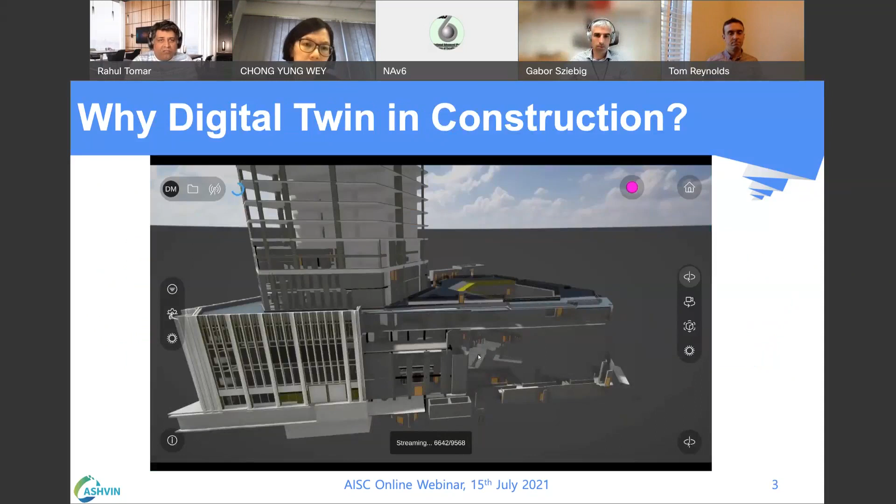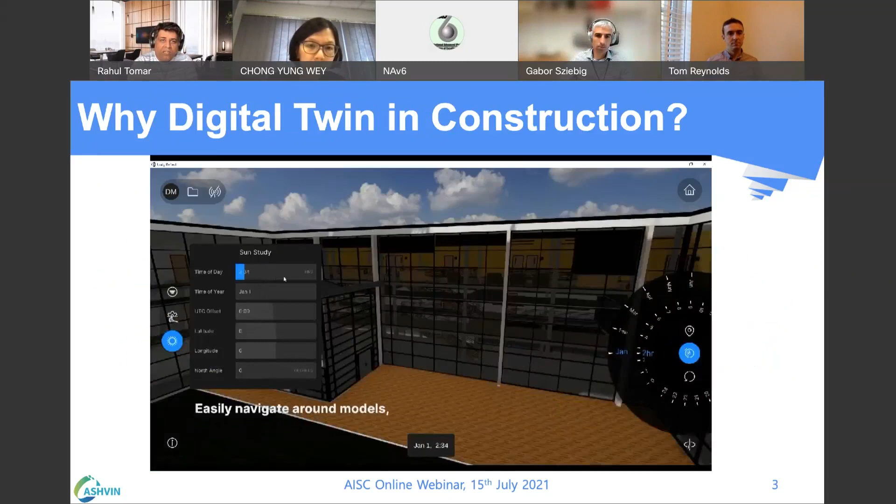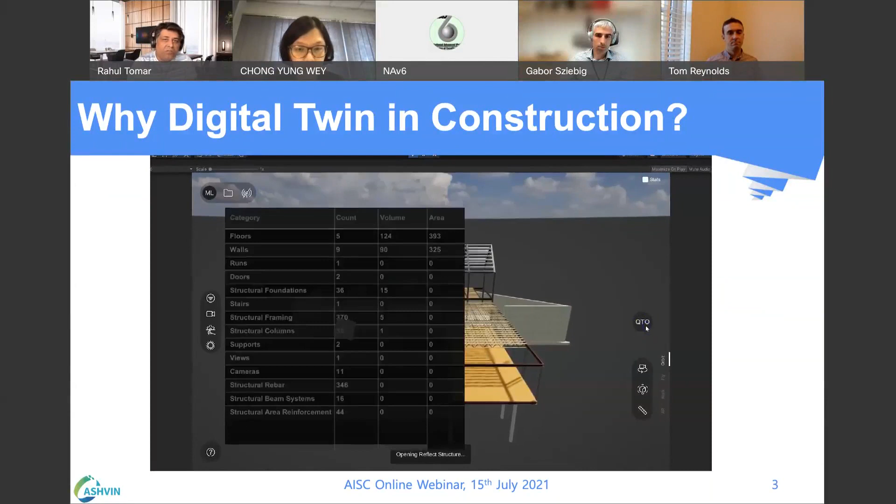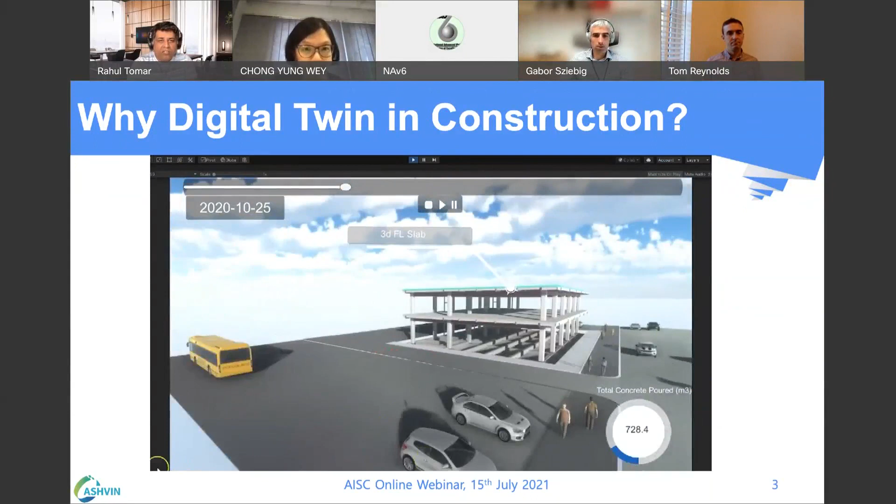But why do we need a digital twin in the construction industry? This video explains it simply: in order to monitor the real construction site in real time with what is happening, and then be able to compare it with the concept of as-built versus as-designed. When this is possible in real time, which is what we are right now working on in our project, Ashvin, it makes life really easier, because currently the data comes from the construction site, then you have to update the BIM model, and only after that can you see what is happening.

How this is going to be possible is to connect every data source from every part of the construction site, and first send it to the central database. This is done using the concept of an IoT platform, which we are building within the Ashvin project. Ashvin is one of our European Commission funded projects under the flag of Horizon 2020, which started last year, and we have approximately 12 partners from different areas.

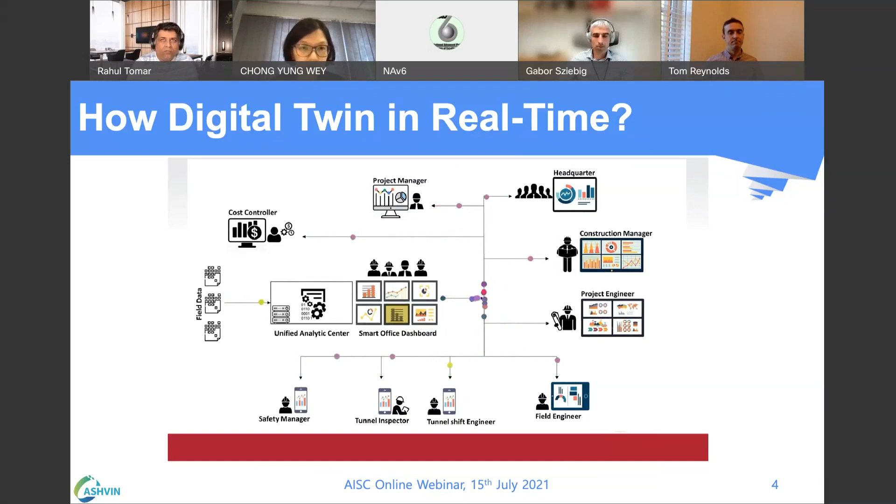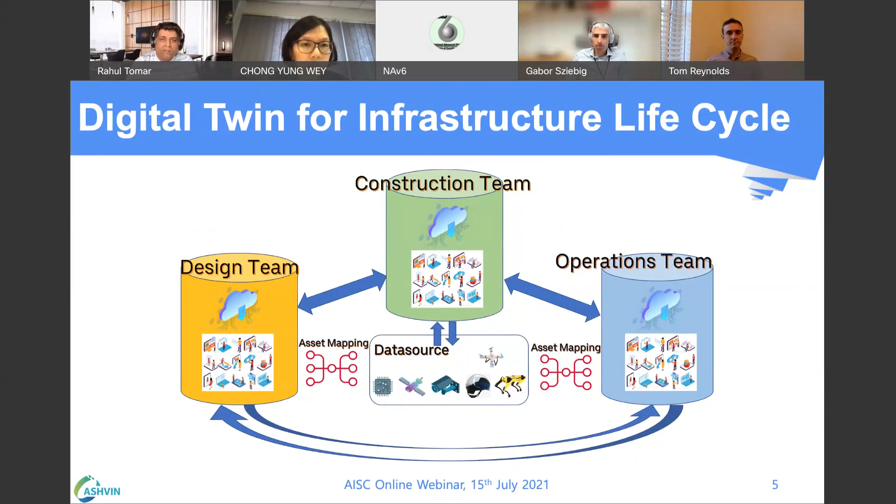What is a digital twin for the infrastructure life cycle? In this project we are not talking only about a digital twin from the construction phase, but also from the design and operation phase. Because unless we combine the full life cycle of infrastructure, there is no point. There are different software available for different phases, and nothing is connected, so everyone is in their own world. Within this project, we want to connect all three phases of the infrastructure so that it can be monitored, constructed in the future, and designed in a better way.

But with the real-time digital twin, we have a challenge. The first challenge is capturing construction progress. We can capture it via 360-degree cameras or LiDAR cameras, but to capture and then analyze this 3D captured video, images, and point cloud is the biggest challenge.

Not offline, but in real time. In real time comes a big challenge: how to capture it, analyze it, then disseminate it into four dimensions, and render this graphics onto the platform, for which we are currently using a game engine, because we realized the video game engine is much easier to render graphics in real time. Still, not with such a big point cloud, but with small point clouds, it's possible to render in real time.

Within the Ashvin project, as I mentioned, we have 12 partners. Technical University Berlin is leading as coordinator, and we have industry partners, research partners, and also Austrian Standards looking into standards for the digital twin, because right now in the construction industry all the standards are basically based on BIM, not the digital twin. So there is a difference. This is what we are also trying to understand, how to create or make new standards possibly within the digital twin format.

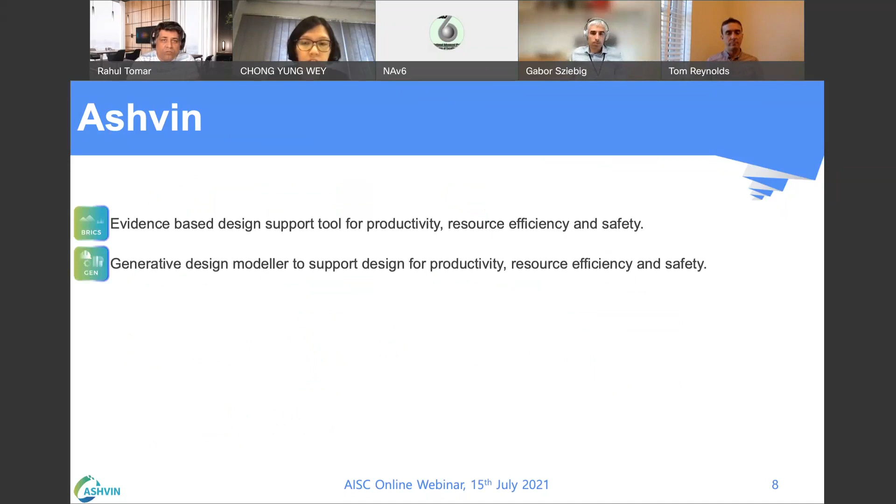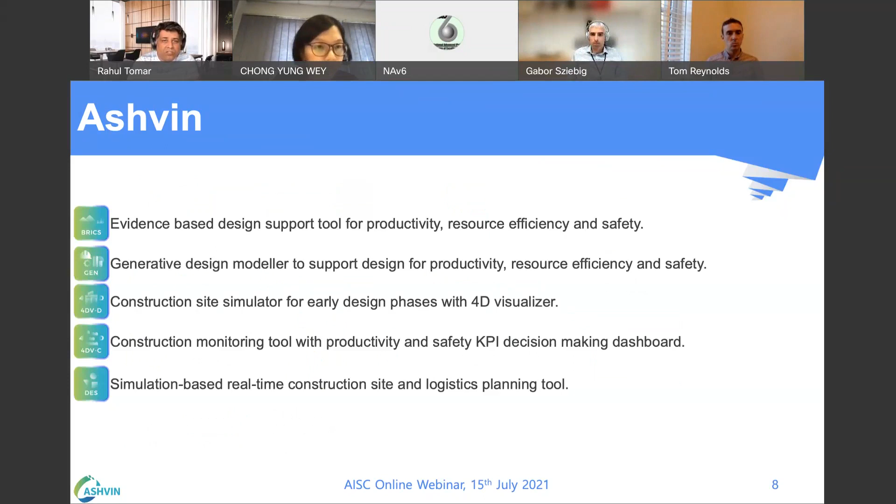In Ashvin project, what we are doing is creating some tools: an evidence-based design support tool, a generative design modeler to support design for productivity, a construction site simulator for early design phases, and a construction monitoring tool with productivity and safety, simulation-based real-time construction site and logistic planning.

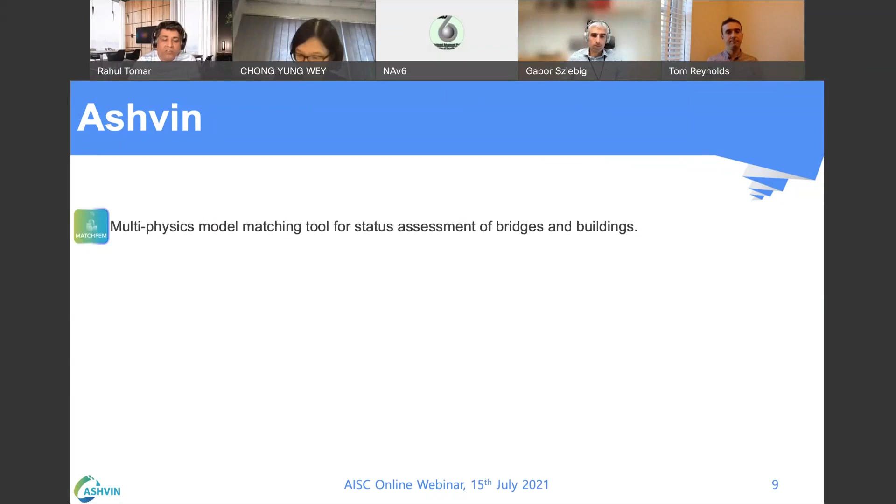The multiphysics model matching tool is very interesting - it's used for status assessment of bridges and buildings, making it possible to use tools like Grasshopper and connect it with the digital twin in real time. There's also a risk-based status assessment tool, GIS integrator for digital twin based asset management, a safety management simulation and training tool, and a configuration management tool to track as-designed and as-built, allowing seamless commissioning.

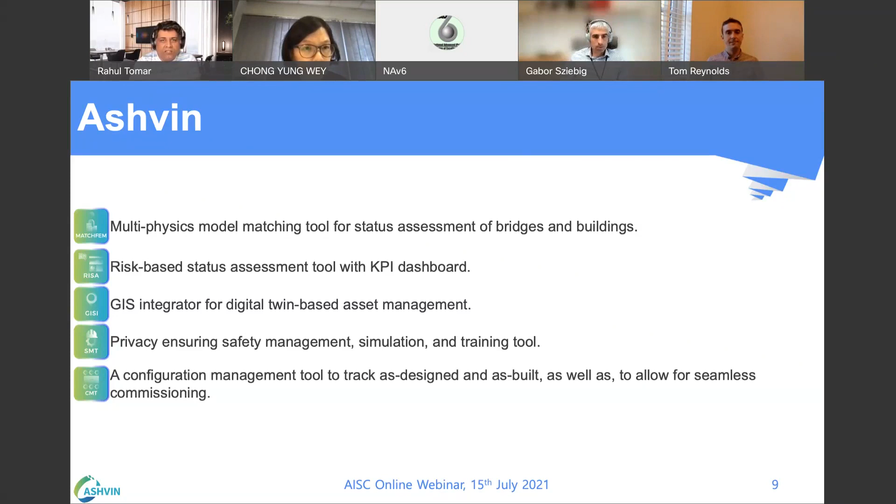So this is about the digital twin, what we are doing. Now the point comes to AI in the construction industry. Digital twin will not work very well unless we utilize artificial intelligence technology also. This is the concept for what we are doing within the digital twin technology.

This will come after our Ashvin project - better AI for better design of buildings through generative design. We are also working on an artificial neural network to predict cost overruns based on factors such as project size, contract type, and competence level of project managers. Right now we are doing this only in tunnel construction, not in building construction per se.

We're developing AI and machine learning solutions to monitor and prioritize risk on the job site, so the project team can focus their limited time and resources on the biggest risk factors. Then there's AI for construction safety, using image processing to understand if everyone is wearing the right gadgets on site, and if any object or person is in between the movement of equipment.

And AI for post construction - when we have to monitor the infrastructure, we use artificial intelligence to understand what is happening and if any predictive maintenance is required.

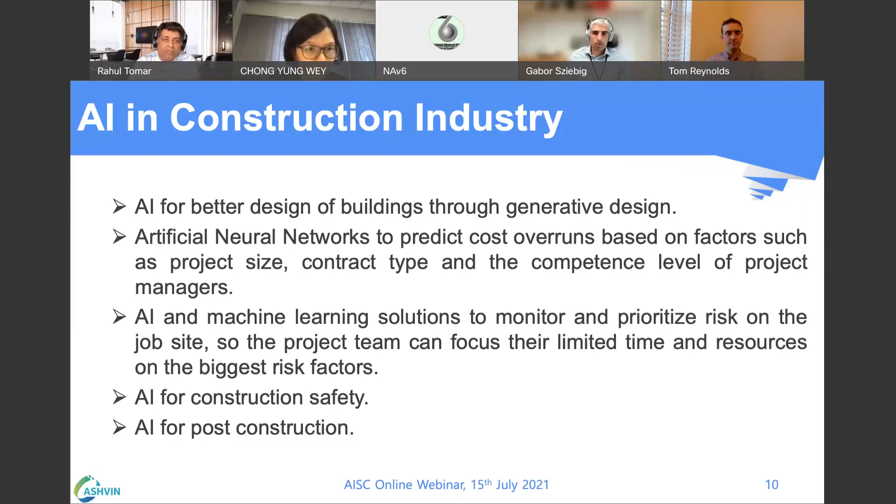For this, within the digital twin technology, we developed a virtual meeting room like what we are doing in this WebEx, but using a VR headset very specifically to collaborate geographically or in real time into the construction site using the BIM model.

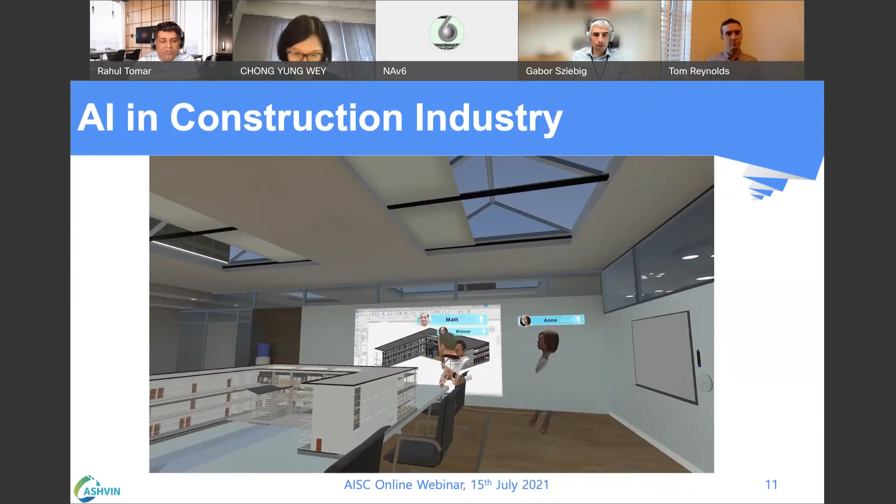So what comes in the future after using artificial intelligence for building monitoring and everything - we are also working on, which is in our pipeline, how we are going to use the complete construction site in an automated way.

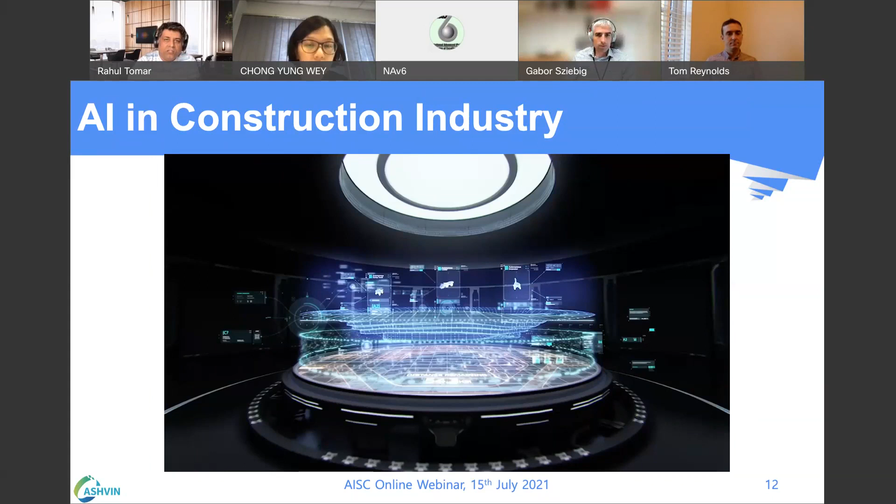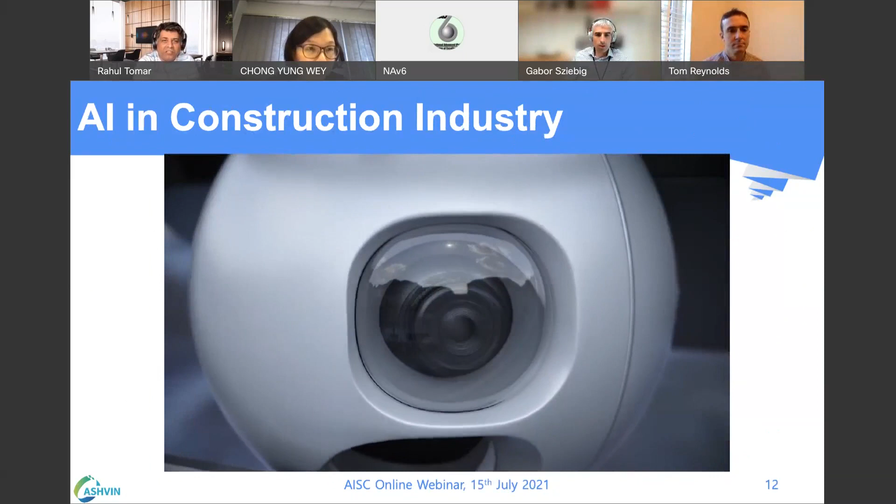So this is the video I'd like to play, which envisions how the construction site of the future, maybe in 20 years, not so near, but can be possible, completely done by robots, using the concept of neural networks.

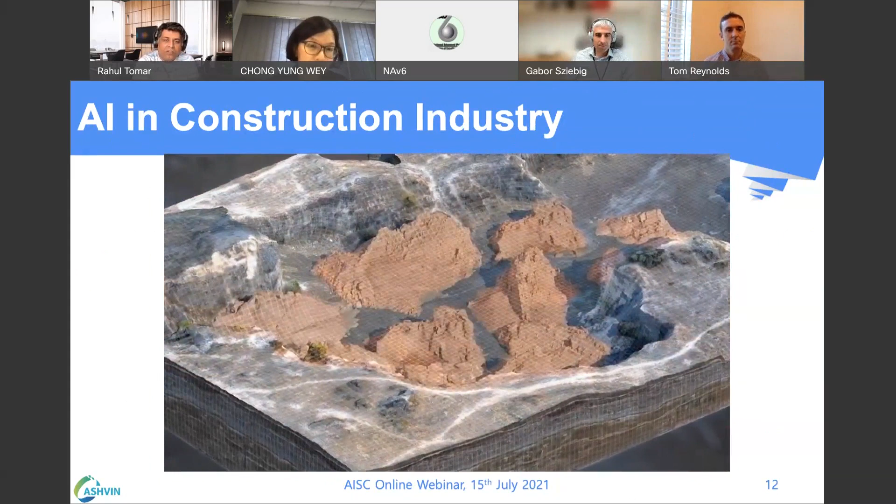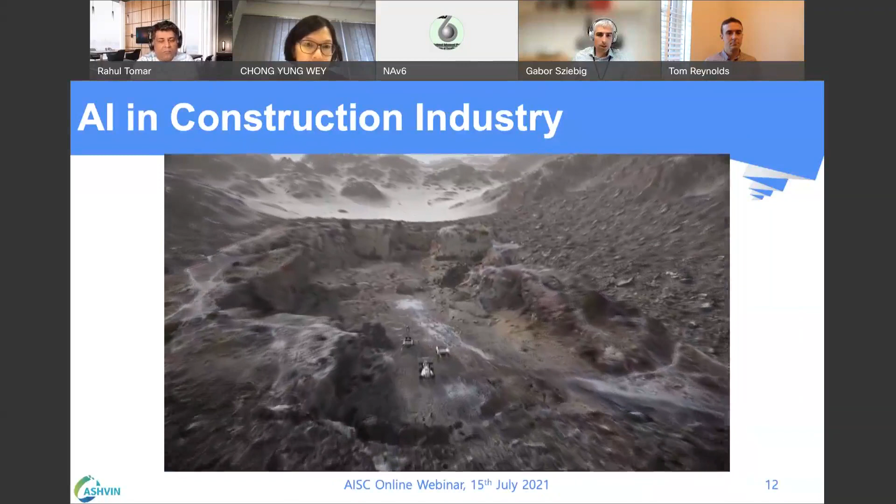Currently, we are working on preparing AI on a chip - basically developing a processor, going to hardware development now, to create a processor which can be utilized inside as a brain of construction equipment, and can be fully automated, not only for movement but also to do all construction work like this excavator is doing.

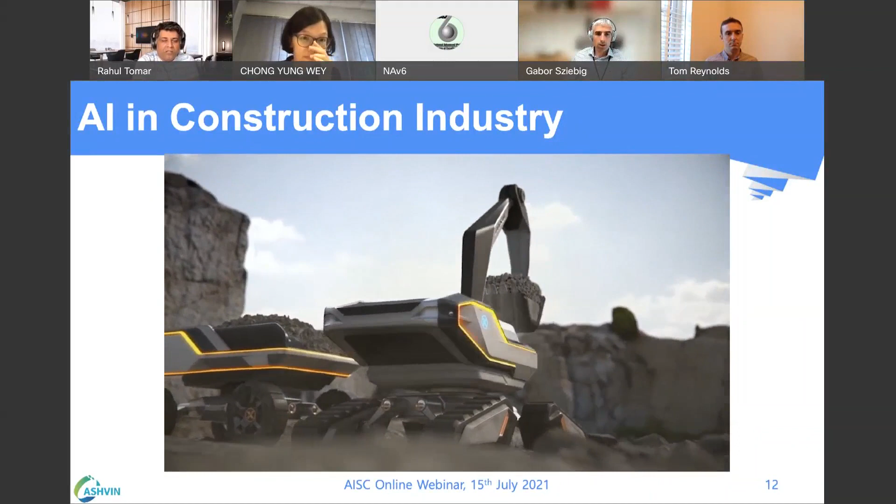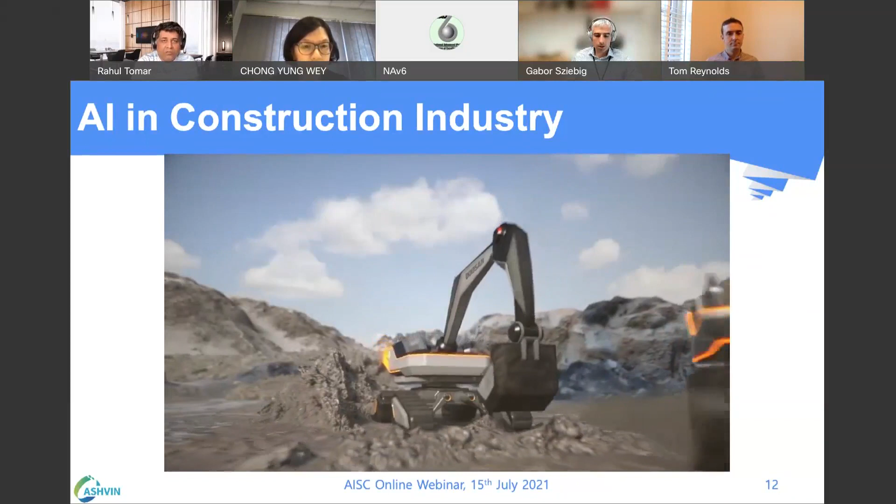So feed the excavator with the complete plan of how much it has to excavate, and the dumper will understand when to move. All this movement has to be done in real time without an internet connection, everything within range, without using the internet connection. That is what our future plan is to go for.

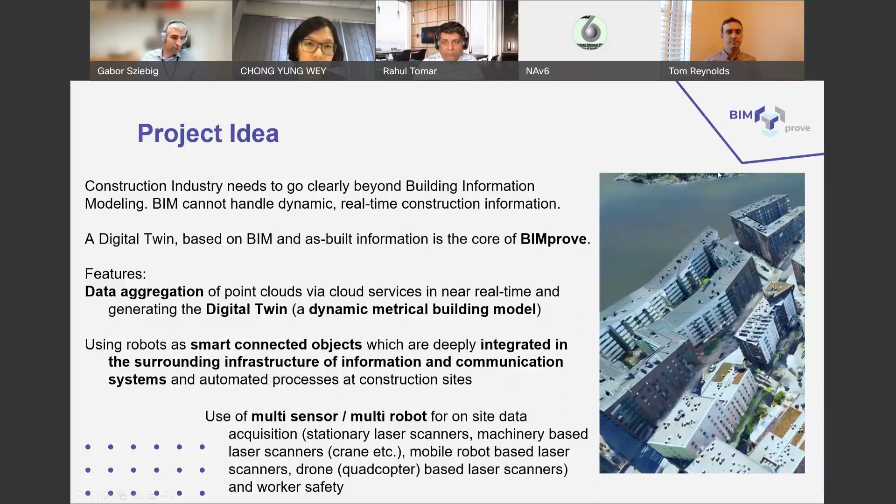We also have DIN, the German Standardization Institute, with us in order to lay the foundation for long-term use of the results, for example in a standard form. We are not sure if we will manage it within the 3 years of the project lifetime, but we are hoping to get at least the first steps there.

And how we represent the digital twin, and how we envision the twin ourselves—this is presented a little more from a software point of view. So what we say is that in order to create a twin, we have to create processes that feed the system, which we call, on the left side, the inputs. And we also need information presentation possibilities, called outputs, on the right side.

All kinds of analysis, artificial intelligence use, and all these analytics and cost functions need to be in the center once we have created a twin. Then we can use the information available in digital form to provide analytics on cost, safety, and also time-wise. That is our vision, and we have already made some small steps in this sense.

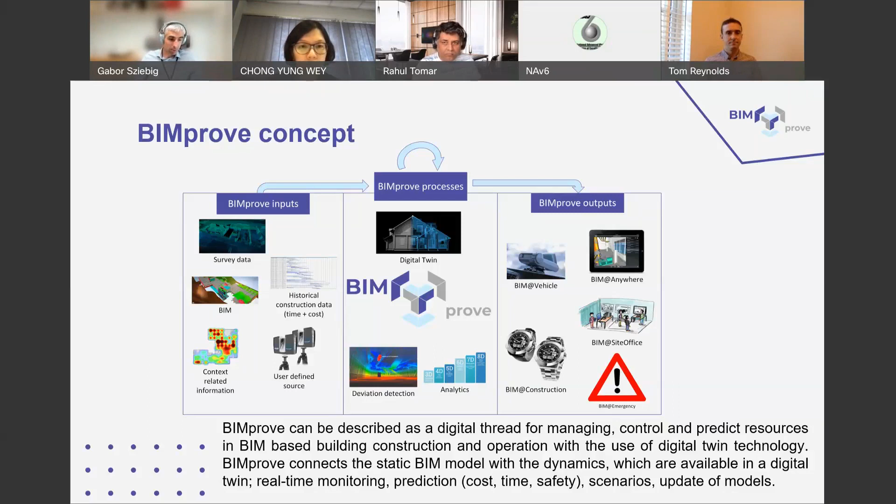So we start with the inputs—let us go from there. We would like to use drones and robots to make a geometrical survey of the site today, to see the progress from the day before, compare it to the expected progress coming from the BIM model, and in addition, as you can see on the lower right part, something we call context-related information.

So in an anonymous way, we are following people on the construction site, so we know that they have been, for example, in a given room. We store this information, so if work needs to be done in a given room, we know people were there, and there should be an expected outcome from there. We are trying to make a prognosis based on whether there were people in a given site of the construction - if you were there, you should have done some work - and then on the next day we will see if the effect was there, if the wall was built or not.

So these are the kinds of inputs for the digital twin. Of course, historical construction data and experience from previous projects is very important, and we are also working to integrate that to create a better prognosis for our twin - how much time, how much cost it will take to create, for example, a wall.

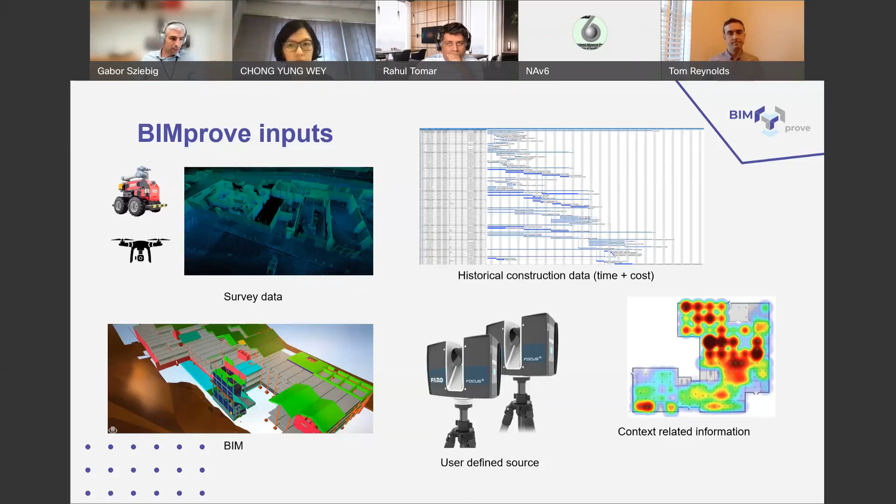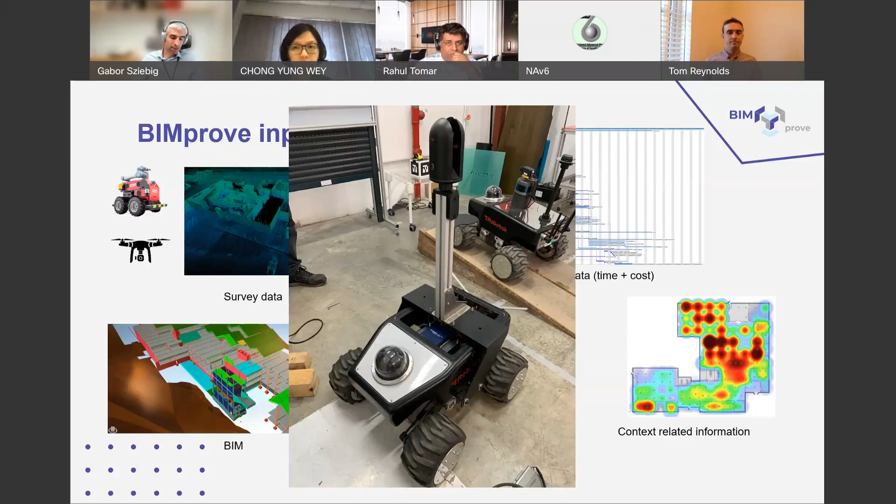We do have a few initial results here. So we have our robot, developed by our Spanish partner, Robotnik. We have an autonomous robot going around the construction site making a kind of digital shadow, as Rahul said, from the site itself. It is an autonomous robot equipped with a laser scanner making a point cloud scan from the construction site autonomously. And we already have our very first drone that is able to create a map, mapping the progress itself autonomously.

So you can create what we call a recording mission. You can specify what part of the construction site you would like to record and what part of the wall you are interested in, and then automatically send in the drone or the ground mobile robot to create a recording from the site itself. These are the very first steps to digitalize the construction site, and the very first results we got so far - automatic mapping of the geometrical progress is already there.

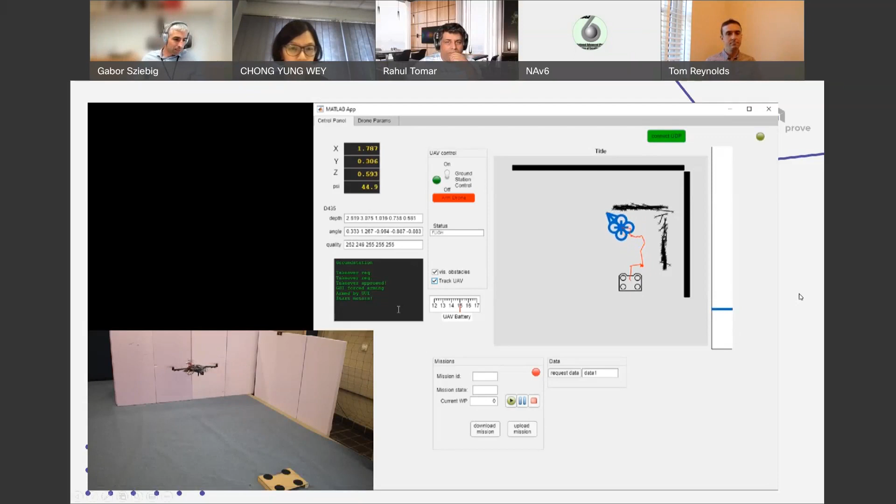Oops, this one should not be like this. One second.

So what we can say is that so far the inputs were presented, but how do you communicate back the twin to the human user? I think this was also shown in the ASHVIN project proposal - you should have a different medium for different kinds of stakeholders on the construction site.

So if you have construction workers doing their everyday work there, they most likely don't need a tablet, but they need a kind of smartwatch or communication channel to easily interact and convey information to them, and also so they could communicate information back to the digital twin. Depending on which stakeholder we are targeting, we establish different communication mediums. So we have a specific solution for the construction workers.

For the truck drivers doing deliveries, we have something called BIM at Vehicle, so there is information for them about when they should deliver goods.

And then we have, for construction site managers or foremen, pads they can use to see what the progress is there. And in addition, if you're on the site manager side, you should also meet to discuss and collaborate, to visualize how the progress is today, how it will be the day after, and communicate issues.

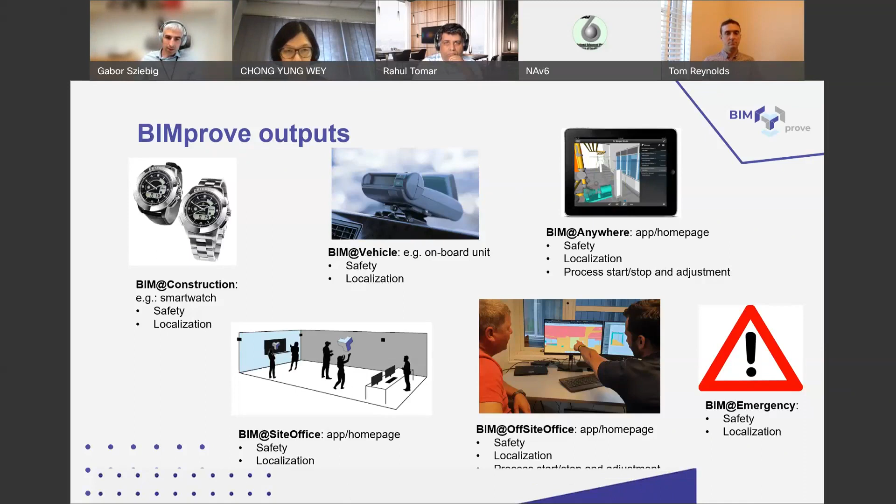What we did so far is create the very first kind of result on the construction site, which is also available on the YouTube channel of the project itself. There you can see two solutions.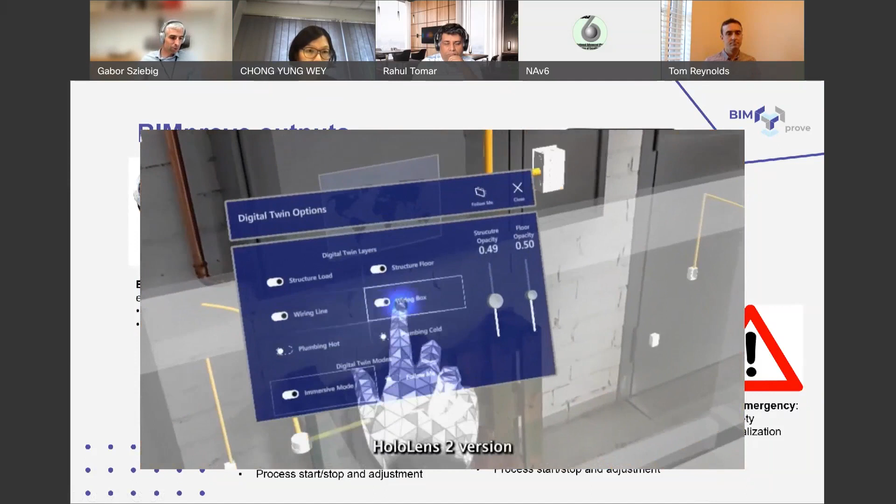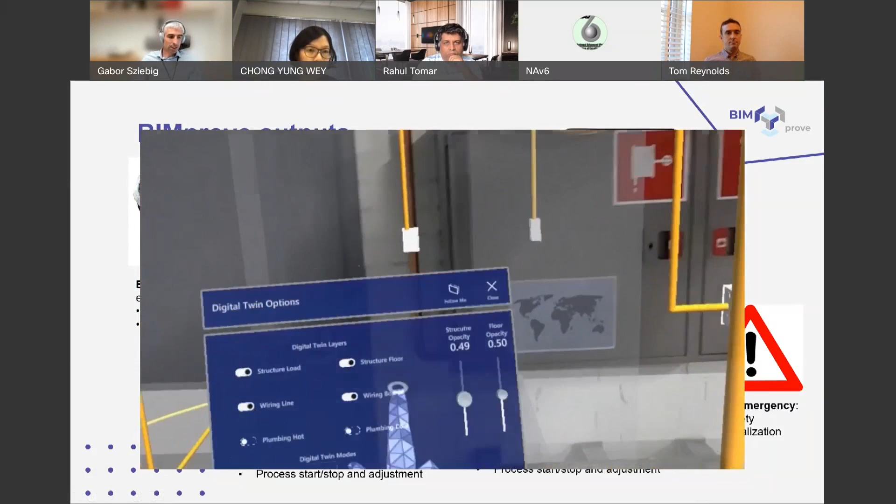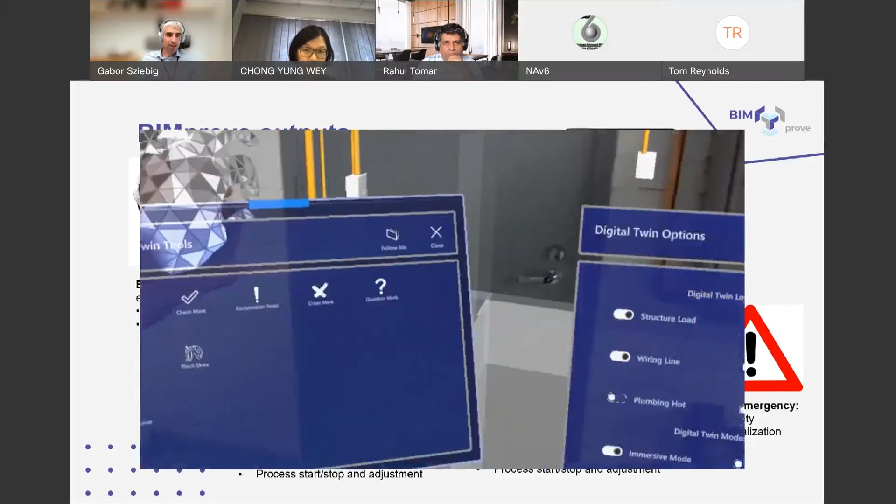One solution uses a Microsoft HoloLens kind of device, where you can turn on or off the BIM model information on the construction site - so where the electrical sockets and so on are. This is a kind of augmented reality solution where you are able to see what was planned and what should be there and where, and you can also highlight issues that come up, showing that this is not where it should be.

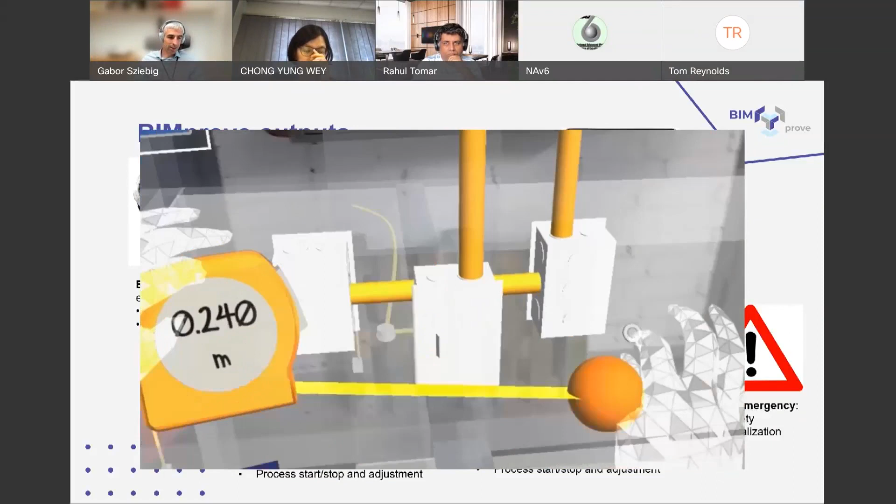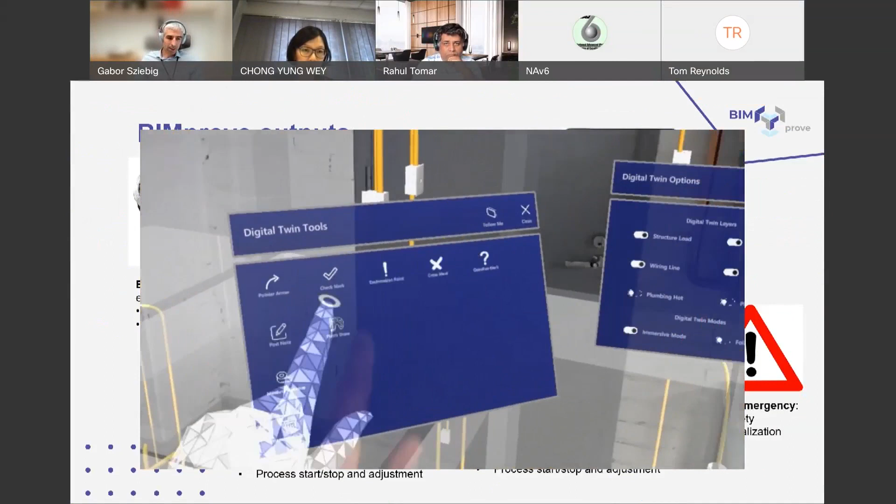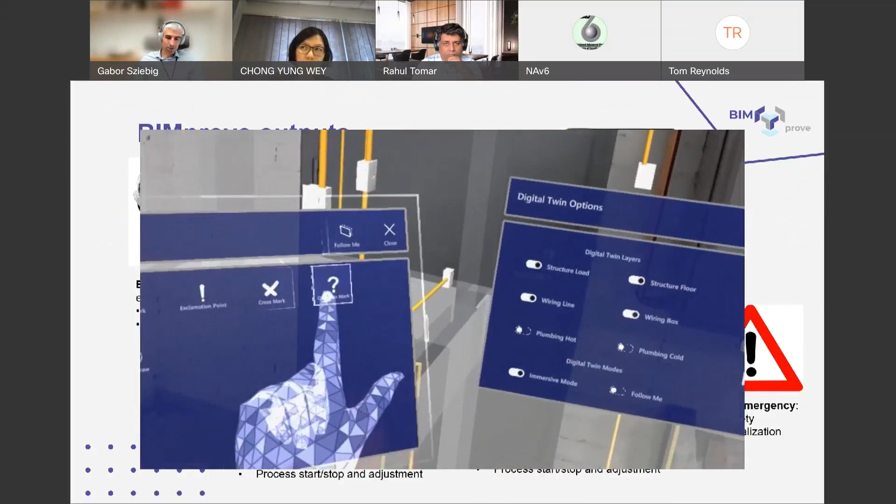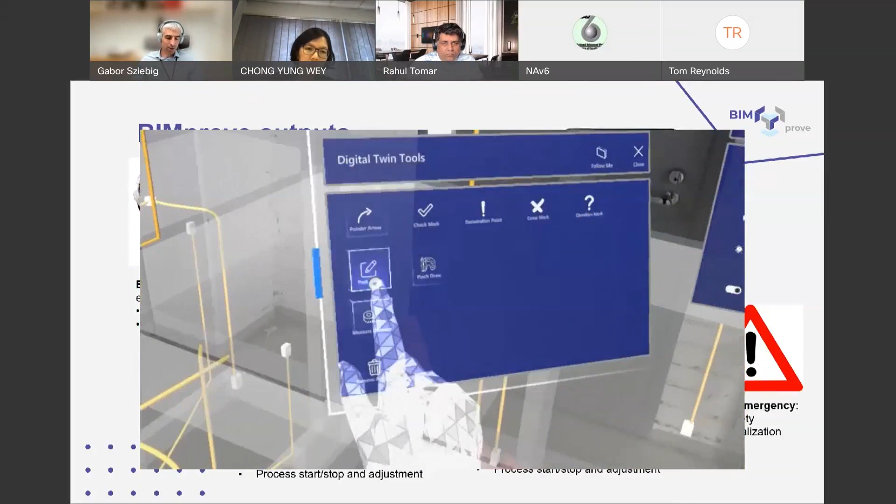You are able to measure distances, offsets, and also where it is. So it is a tool mostly adapted for the site manager or site survey personnel, to check that this is correctly placed or not correctly placed. You are also able to create check marks confirming that this is proper, and this information is saved in the digital twin for later use, so you can confirm it was done and approved by the given personnel, and trace it back if it's not as it should be.

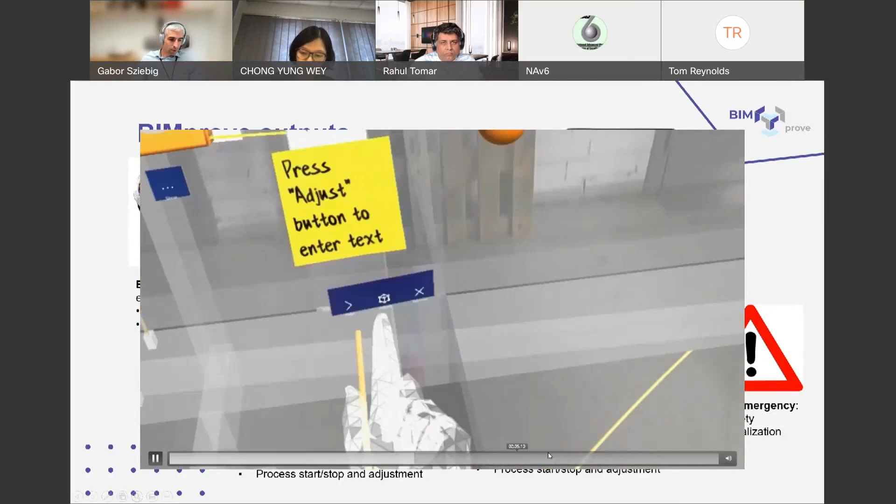This also exists in a tablet mode, not the augmented reality version, so you cannot really feel that you are part of it, but it's a very useful tool if you are on the construction site and want to check what's the difference, where it is, and what you should do.

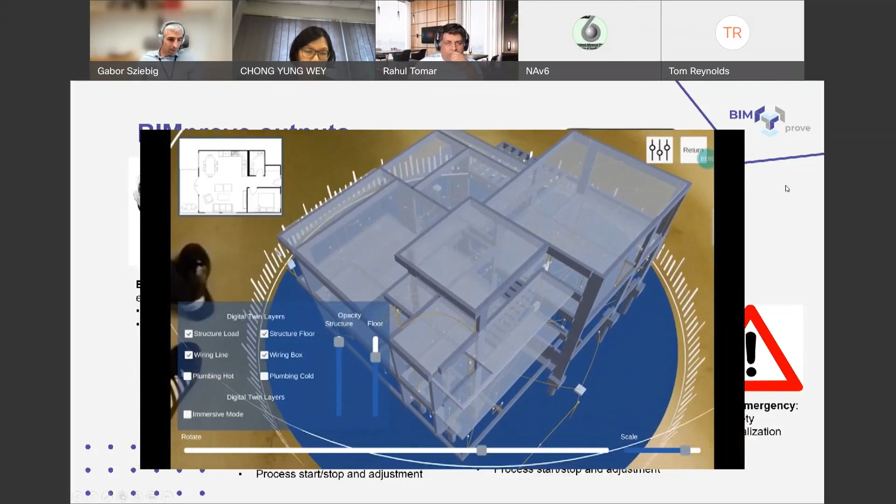So that's the part for the outputs. Now about analytics, and maybe the most relevant part, the AI part.

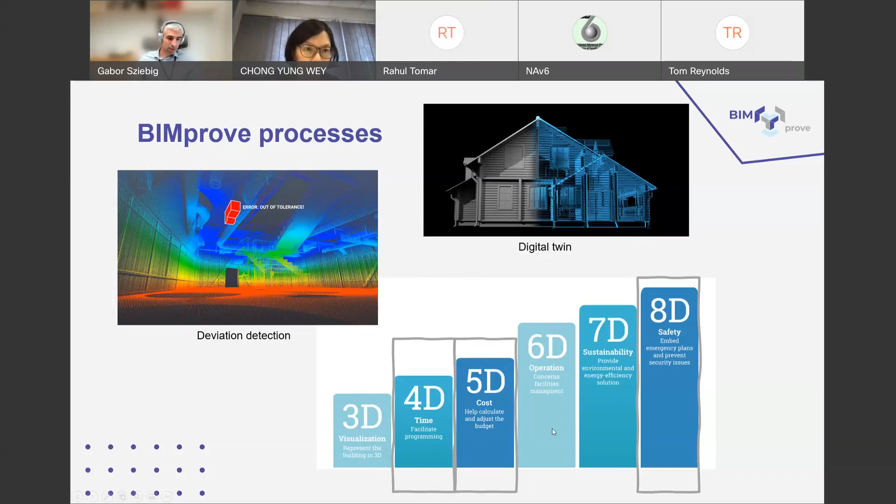When we have created this digital shadow, collecting all the information from the sensors, from the users, and all the geometry recording of the construction site, we can provide people additional services such as time estimation, cost estimation, and safety checks. This is what we are working on, not yet available in the project, but something that is under establishment.

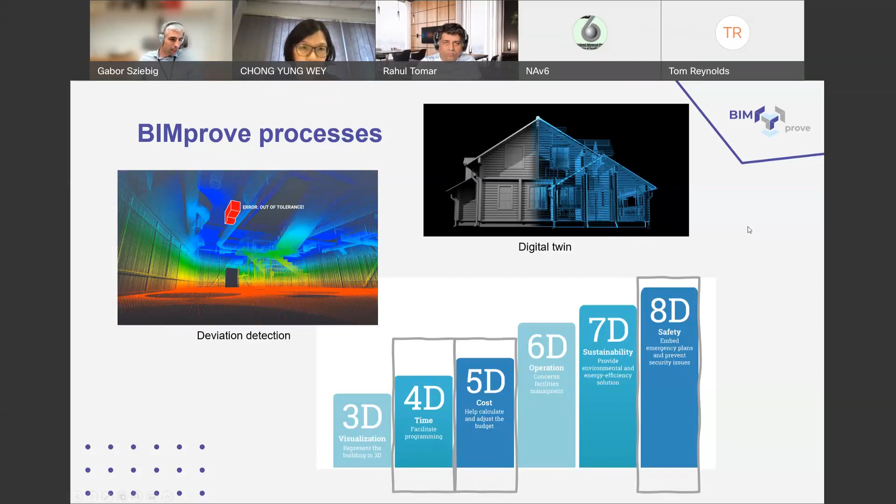These processes, most of the tools here, are building on a wide database that gathers all the information from the construction site and uses that information. The twin, in our case, is a rolling time window, we can say it like that.

So we record every personnel, every robot who is on the construction site, and you can spool back and forth like in YouTube to see what is happening on the construction site, in every second, happening on the site itself.

So we can see the actual progress with this rolling time window.

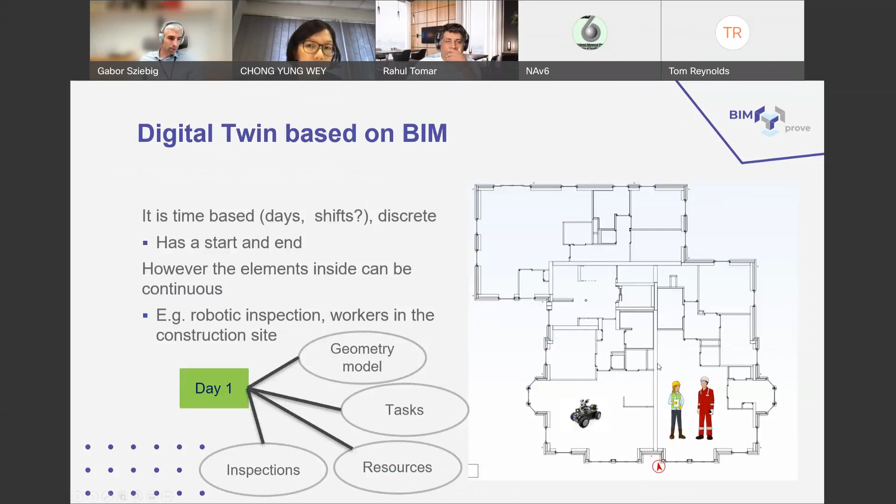If you would like to connect this rolling time window to the formal way the construction sector works today in a contractual way, this is visualized here. We start from a common truth, the BIM model of the construction site we would like to build, and the digital twin is a copy of that. On the very first day of construction, these are totally equal.

Then when we get, for example, a design update from the client, you merge this information into the twin in a very formal way. Everything is traceable, so everyone has to approve that the change has happened and been done.

Then we also do an automated check by robots, a comparison between as-designed and as-built, and then we get a kind of fork from a computer science perspective.

We actually create an issue that there is a change according to the plan, and this needs to be approved. The approval rate is of course slower than in the original setup of the construction sector. So whenever there is a change from the original to a deviation, we need to get an approval from the client, and this is way slower than the update of the digital twin.

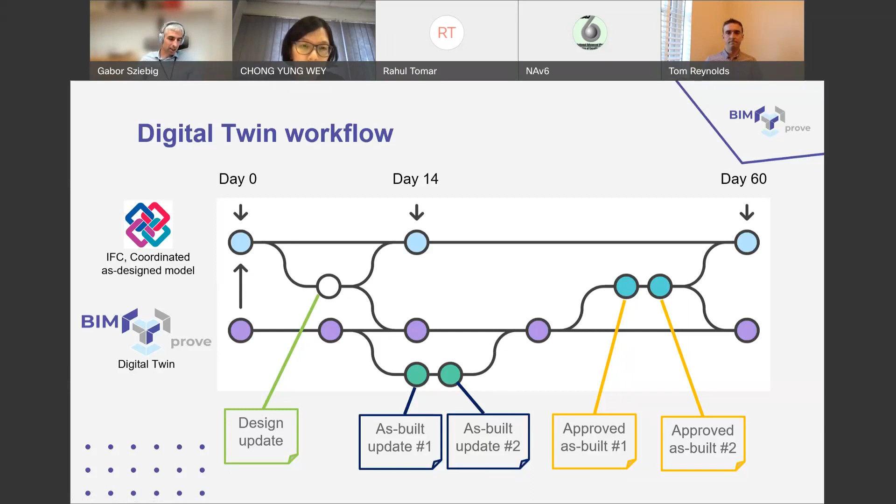And we will demonstrate this twin, the use of the twin, in three different places: one in Switzerland, one in Spain, and one in Norway.

All of them have a little bit of a different kind of focus. In the case of Switzerland, our pilot use case there will be focusing on fire protection. Fire doesn't occur that often on the construction site, but when it occurs, it has a major impact. So we will try to avoid that kind of fire in the construction site.

In Spain, we will be focusing on fall protection. It will be a focus on uncovered regions where usually people can fall through, like shafts or elevator shafts. This will be trying to use that as a case for us. And in Norway, we'll be using a normal digital twin, solely focusing on the cost and time question there.

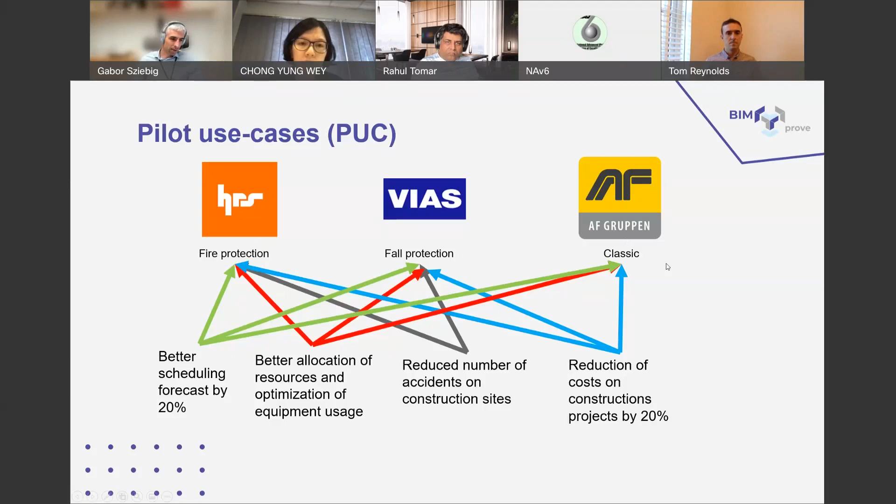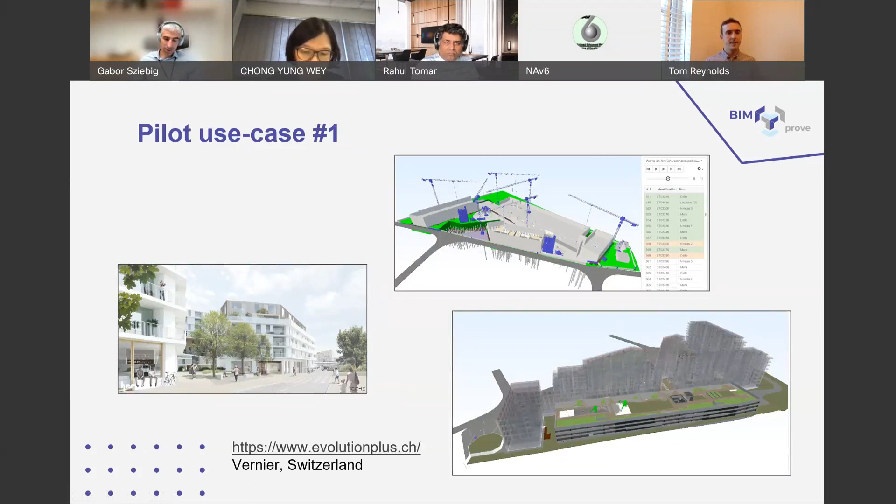Some pictures of our pilot use cases. In Switzerland, in Vernier, there will be the construction site used, and we have a place where they build parking slots, parking garages. Because there is welding going on in the construction site, this is where we would like to prevent fire occurring in the process, or detect hazardous fire events.

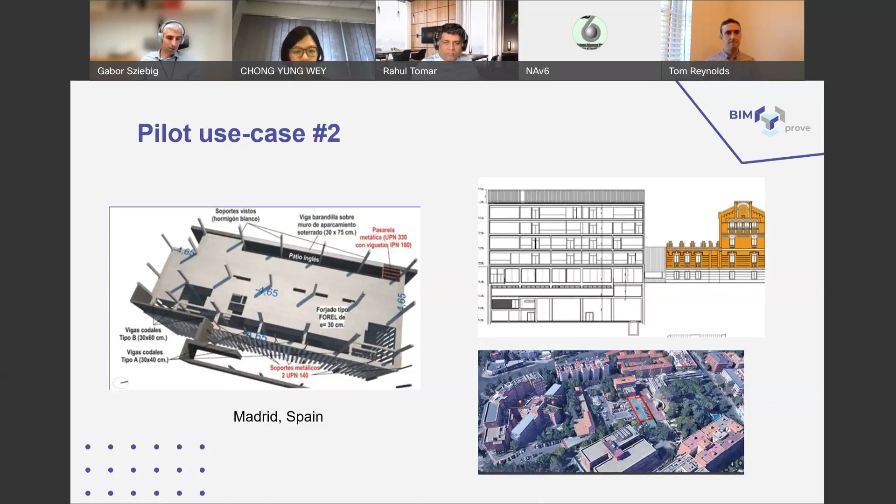In Spain, there is a rebuild and expansion of an additional building in Madrid, Spain, where there are parts that will have holes cut in the slabs of the different floors. This is where we would like to highlight preventing falling on the construction site with the use of digital twin technology. And last but not least, we have also a site in Norway.

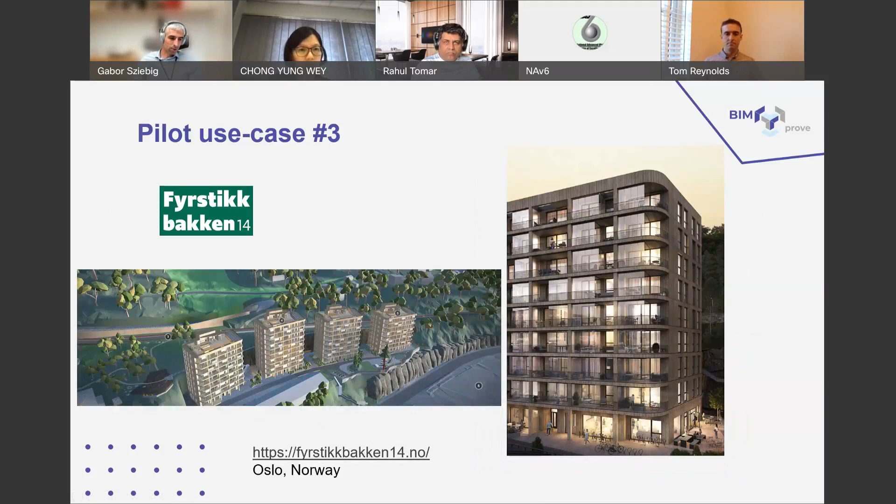It is in Oslo, the main city of Norway. There are residential houses that will be built, and this is where we would like to highlight that the use of digital twin will give you a spare of 20% of cost and time related to classical construction processes.

So that's what the project is about, and you can read about how we see digital twins and data integration in the AEC sector here in this white paper, which is free to download. You can also read more about the project on the BIMprove Horizon 2020.eu website. Thank you for your attention, and open for discussion later on.

Thanks, Gabor. It's a very good use case that you presented just now. Before we move to Tom, there is a question, although Rahul, you already answered that in the chat, but maybe if you want to add anything - the question is, is there any connector between the BIM model and FEM model? Maybe for Rahul and also for Gabor, anyone want to add on?

In the ASHVIN project, we are working on this thing, to connect the FEM model to the BIM model. Currently, we have done it using Grasshopper. We take some results from Grasshopper and then simulate that result into the digital twin platform in real time. But right now it is in a beta model, so still working on it. I'm hoping by the end of this year we can do this in real time and present it to the project. So this is the goal of ASHVIN, to make the connection between the finite element modeling and the digital twin.

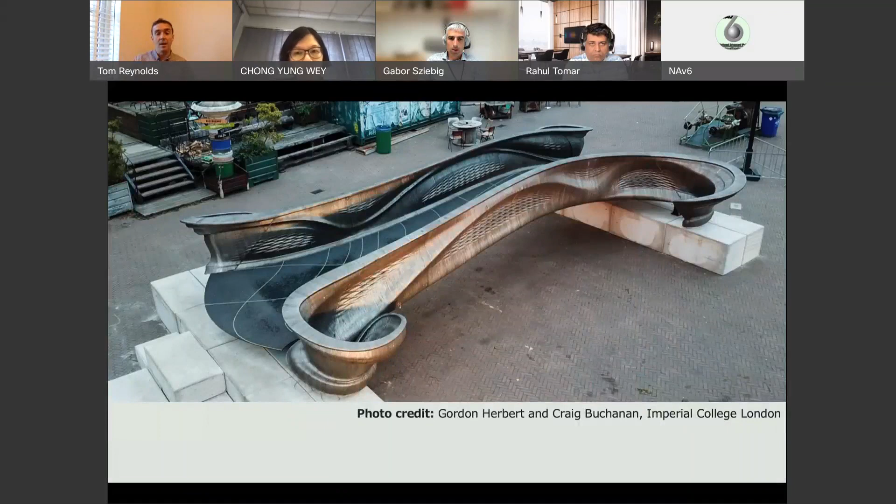In contrast to what Rahul and Gabor have been talking about for the most part in their talks, the focus of our digital twin is on the operational behavior of the bridge, the operational structural behavior, and on how it's used by people. So this video describes the development of the bridge.

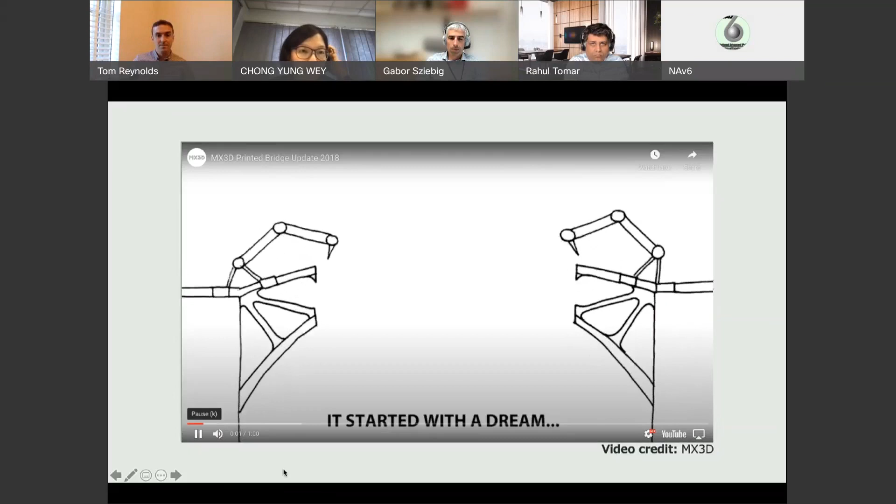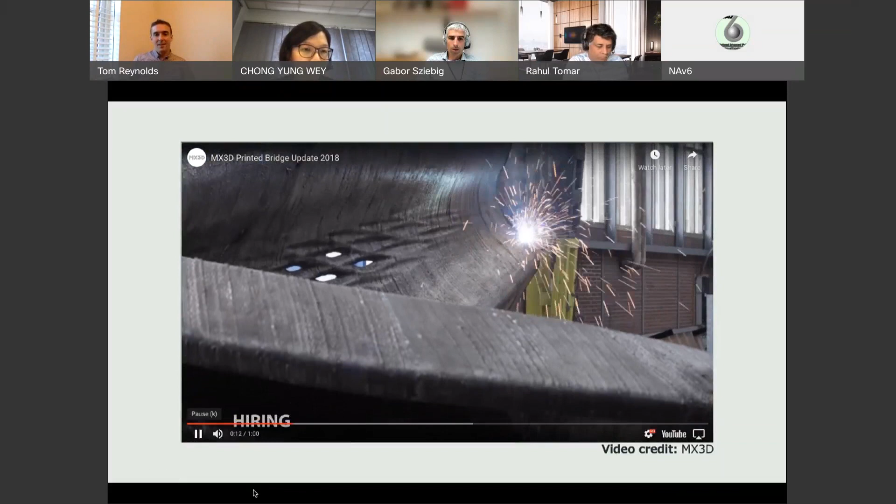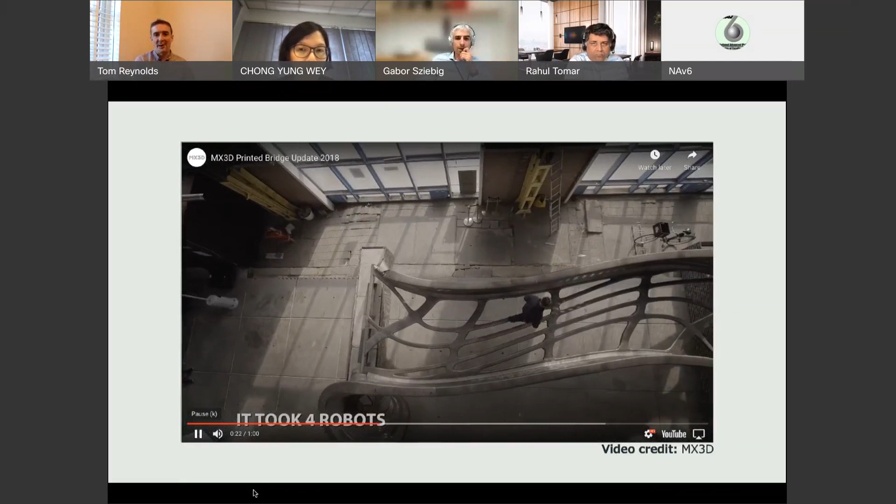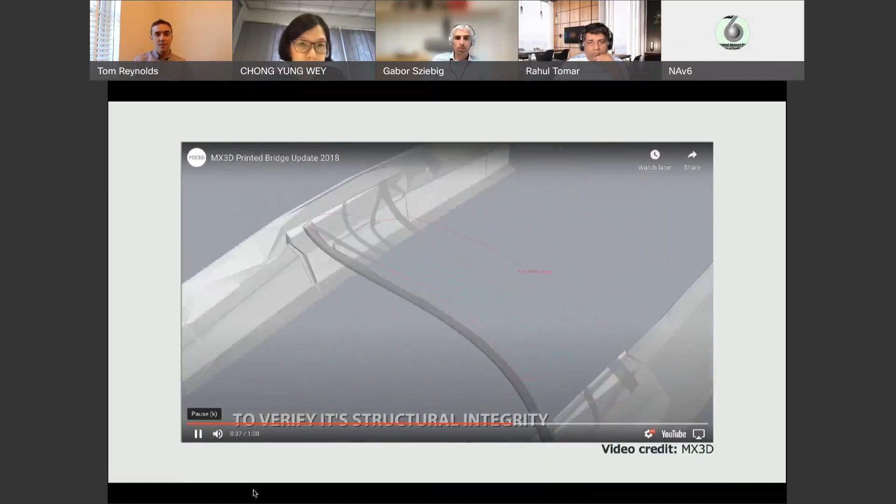The bridge is 3D printed with wire arc additive manufacturing, so it's almost like a continuous weld of stainless steel, which enabled MX3D to create this continuous, quite organic shape of the bridge, which would have been very difficult with conventional steel processing. It's now in place over the canal in Amsterdam.

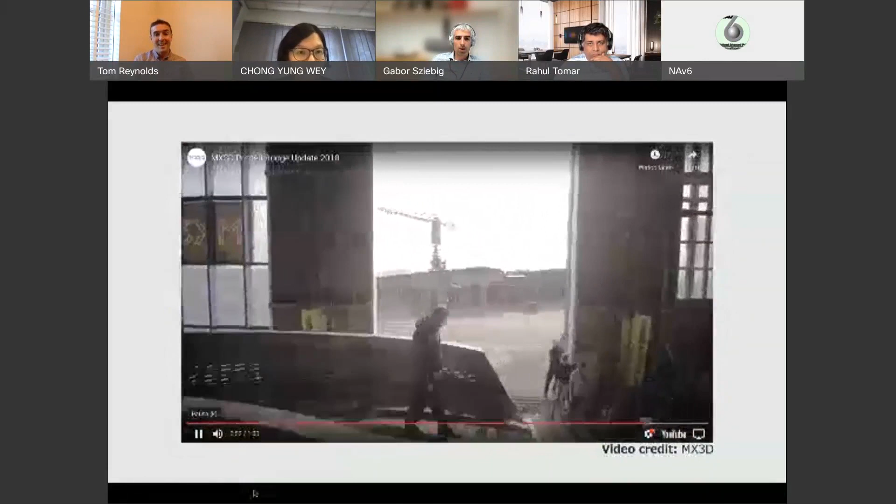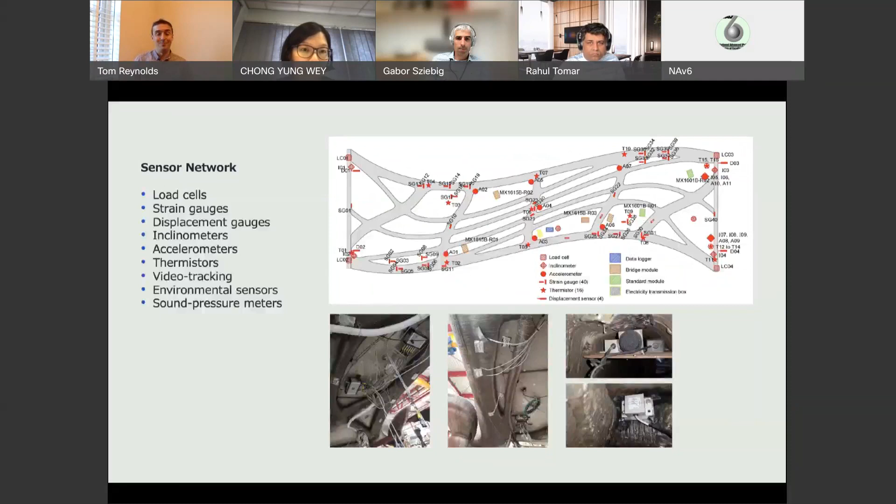What's next, I suppose, following on from that bridge is this. It was notable seeing Rahul and Gabor's presentations, the large teams and consortiums of partners required to really understand these projects and work towards digital twins. So what's happening now is our consortium is working with the sensor network on the bridge, trying to get the inputs we'll need to eventually develop a digital twin.

I'm not going to be able to show you 3D models of completed digital twins of the structure, but I'll talk you through how we're working towards that, by understanding what information we can get from different types of sensors on the structure. There are quite a lot of bridge structures out there which have a lot of structural sensors on them, but the MX3D bridge stands out for the variety of different sensors and the different things we can find out, which will enable us to look in detail at different aspects of the bridge's behavior and think forward to future implementations of these systems.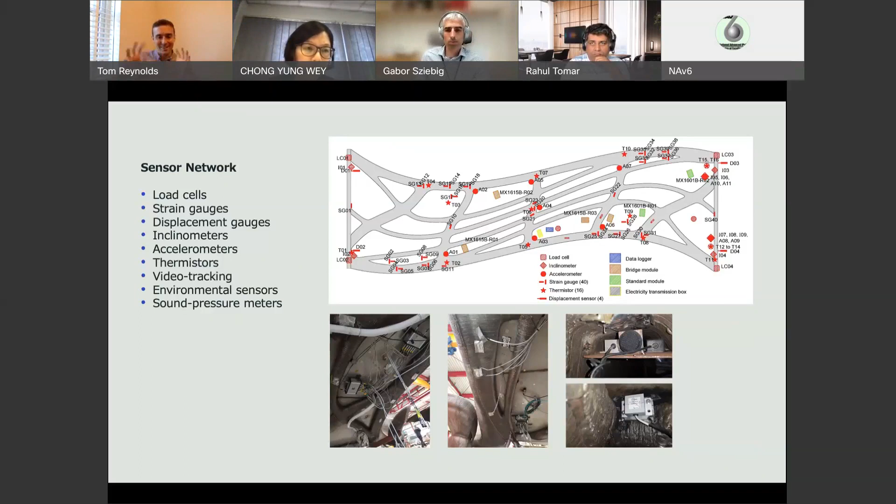There's a list of sensors in the sensor network down the side of the image, and a map of how they fit onto that organic shape of the bridge. The pictures at the bottom of the screen show how much we look forward to wireless sensor technology and being able to do these networks wirelessly. The cabling for a major sensor network on a relatively small bridge is so difficult to cope with, channeling around the structure, and you can see a bit of what you end up having to do with controlling those cables and fitting them all in.

So with the sensor network, I think there are three very broad aims of what our team is trying to do overall, and my personal involvement is just in one of those. So the first key aim is that this 3D printed stainless steel is a new structural material for a structure of this size. Having a sensor network, building a digital twin, is an opportunity for us to really accelerate the understanding of the in-situ behavior of a structural material.

The construction industry is so dominated by steel and reinforced concrete, and perhaps timber to a certain extent. If we are going to change the way we build, address the climate crisis, and all the other environmental impacts of the construction materials we use, we're going to need to be able to understand new materials more quickly. So that's one of the things we're trying to do here.

But we will also be able to - so Amsterdam sells itself as a smart city, and this bridge is a chance for us to understand and communicate to the city the usage of the bridge, who's using it, in what way, and at what times.

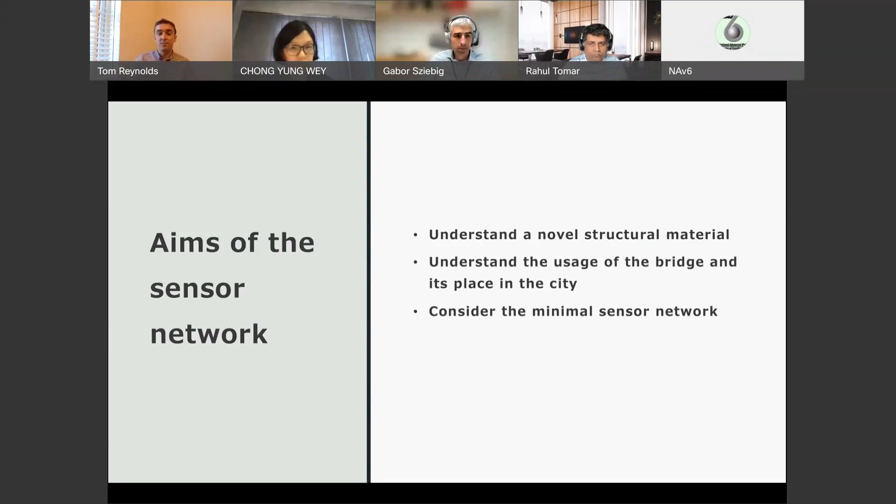And then thirdly, there's quite a diverse sensor network on this structure. By understanding this diverse range of sensors, we can consider how other structures in the future might be more minimally instrumented to still get good information.

One of the really fascinating types of sensing that we've got on the structure is driven by our partners at Autodesk, who are really leading the software side of implementing the sensor network. They have a system for taking videos of the bridge and anonymizing the people who are using it, turning the video images into these colored kind of skeletons of people moving across, so that we can have anonymized data on the way the bridge is being used that can be more ethically used by governments.

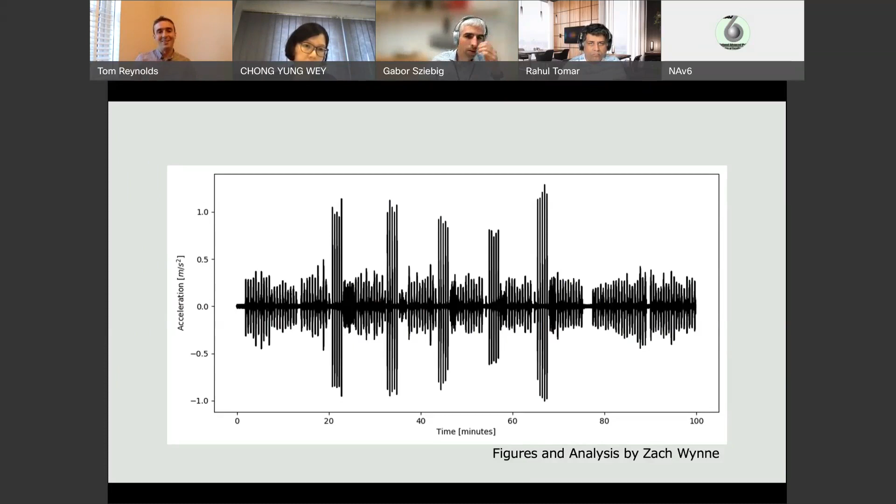In my work, particularly with my PhD student Zach Wynne, we're looking at one particular type of sensor on the bridge, which is accelerometers. Here's a set of accelerometer data from the bridge, and you'll see that it's kind of fairly unintuitive in itself. We can see some increases in usage and reductions.

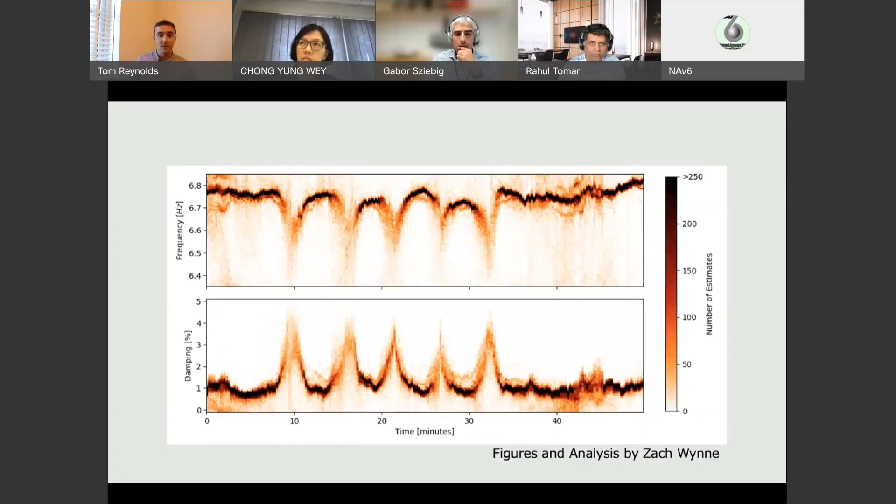What we do is we turn that into engineering parameters - frequency and damping measurements. We can now see how those wander around, and there are clearly different times and patterns of usage in the bridge. Zach's real innovation is to take those changes in frequency and damping and use them to estimate what the load applied to the structure is.

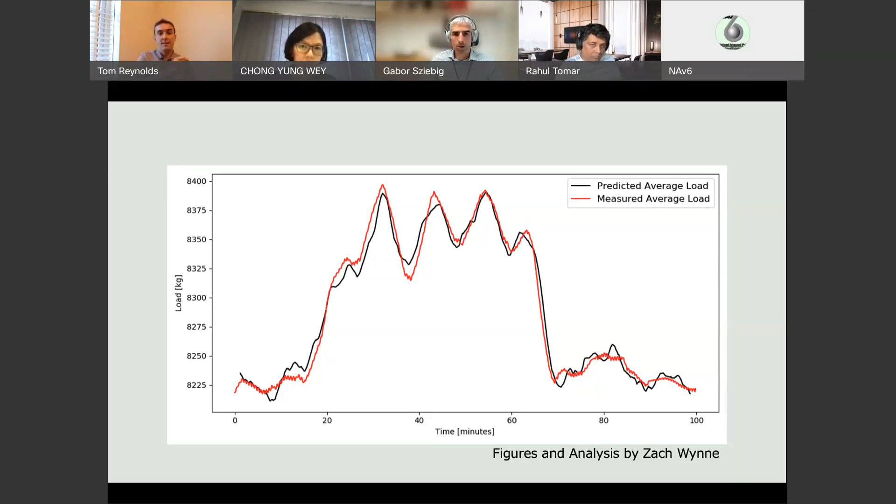We're finding that by looking at those changes in frequency, we're able to map fairly well the changes in load on a structure. This is the kind of information that, for a structural engineer, for a use-stage digital twin of a bridge, is absolutely key information - how well do those loads that the designer assumed at the design stage compare to the real usage, and what needs to be updated in that sense?

As we move on towards a digital twin, we're starting to look at how our measurements compare with finite element model by partners at Imperial College London, led by Leroy Gardner and Craig Buchanan.

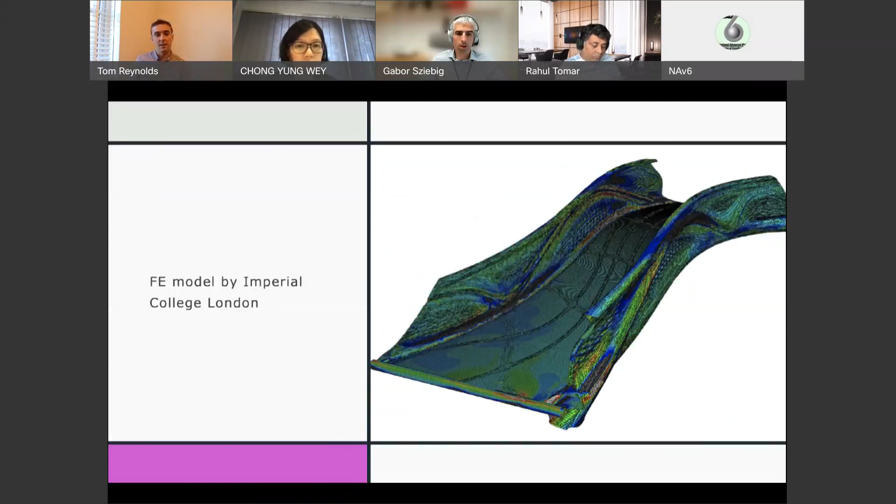Okay, thanks, Tom. So, you were working with a lot of sensors, and those data from the sensors are important for creation of digital twins. So, is there any standards process or verification in place to help filter out data that maybe are not good or unnecessary?

So that's certainly something that we're building up and working on. Let me stop my... is that okay? There's a little bit of background noise there. I'm just going to stop sharing my screen. So yeah, data verification and dealing with when sensors drop out and where we get unusual values from them.